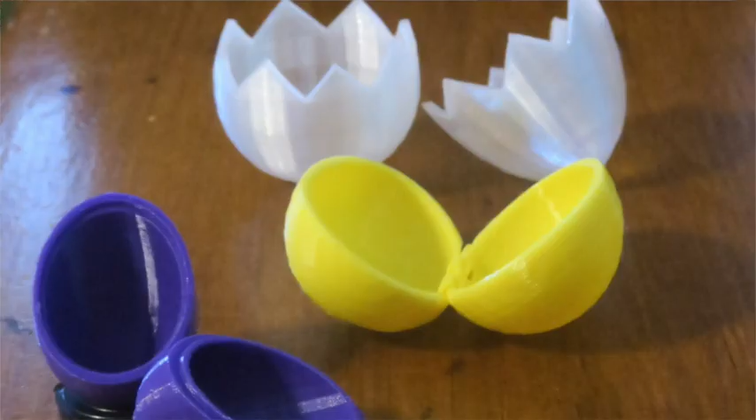Welcome to the fourth part of our Tinkercad egg puzzle demo. So we're making a toy consisting of several eggs, each inside the next one. And the last layer that we made was this here. So this was a piece consisting of two halves that are connected by a hinge. So the next egg that we make will have to fit inside.

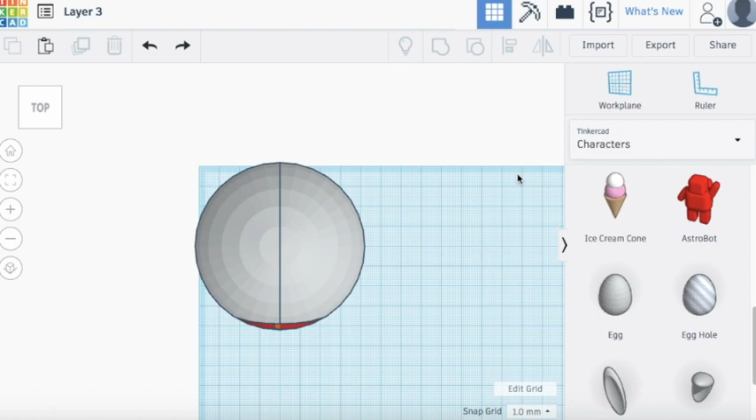The next layer is going to be again an eggshell, and this time we're going to cut it open diagonally. So let me take these egg pieces and make them transparent. Now if you look here carefully, you see that the available space from here to here, we measured that last time, it was 60 millimeters, but here from top to bottom we don't have 60 millimeters because the hinge actually takes up a little bit of extra space.

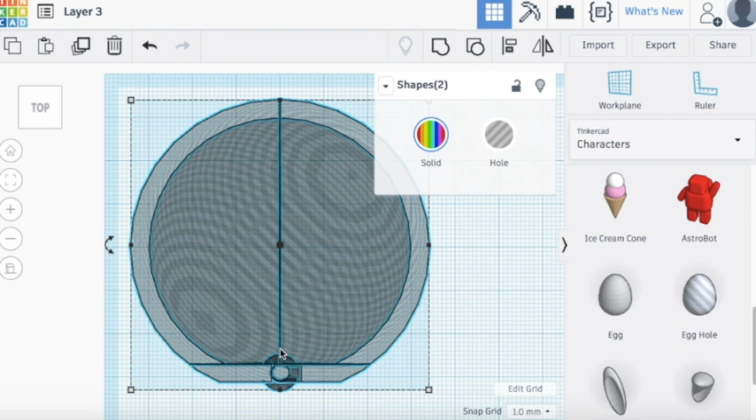So the next egg that's going to go inside here is not going to be quite round. We're going to use 56 for the width from here to here, and we're going to use 52 from here to here. So let's bring the next egg in. And we're going to make the width 56 and the depth 52 millimeters. Okay, so that's going to be a little bit oval.

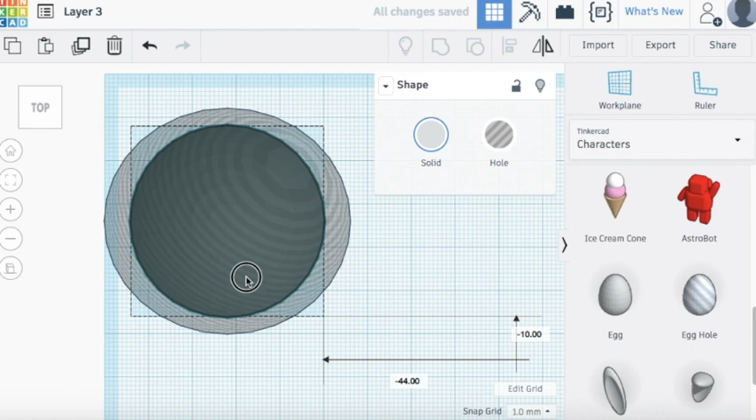And inside this egg, we want to fit a hole. And the hole, we're going to take 44 by 44. So we want the hole inside to be round, even though the egg is not exactly round. And the reason for this is that the next layer of the puzzle is going to be, again, round, the one that goes inside this hole. Oh, we also need to adjust the height of these two pieces. So we're going to use 76 for the height of the outer egg, and we're going to use 68 for the height of the hole.

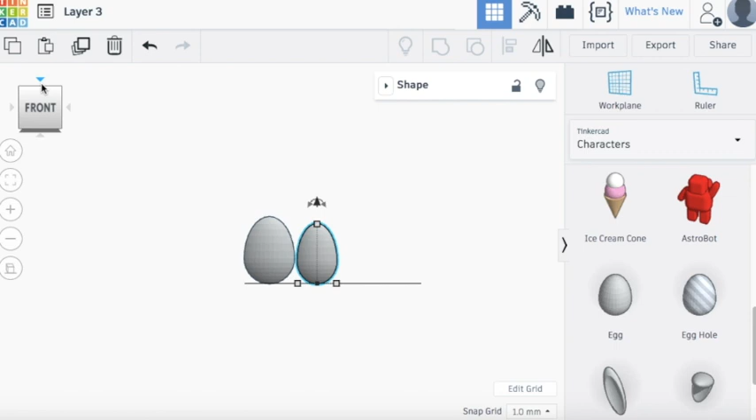Now, cutting it open diagonally will not be very difficult. But we also want, where the cut is, a slight lip to make sure that the pieces don't slide off each other. And making this lip is actually a little bit complicated. So we will actually need 4 concentric eggs instead of just these 2. So let me move this out of the way and bring 2 other eggs in.

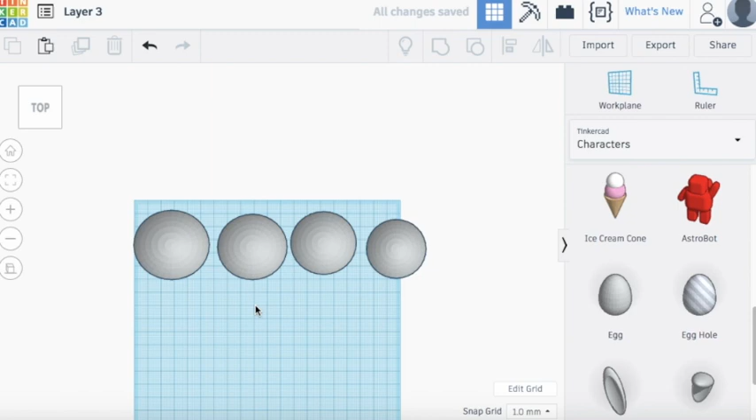So we had 56 by 52 for this egg. Then for the next layer here, we're going to use 51.5 by 49. And for this egg here, we're going to use 48.5 by 47. Okay, so each of these eggs is just slightly smaller than the previous one. And we will adjust the heights also. For the height of this egg, we're going to choose 73. And for the height of this egg, we're going to choose 71.

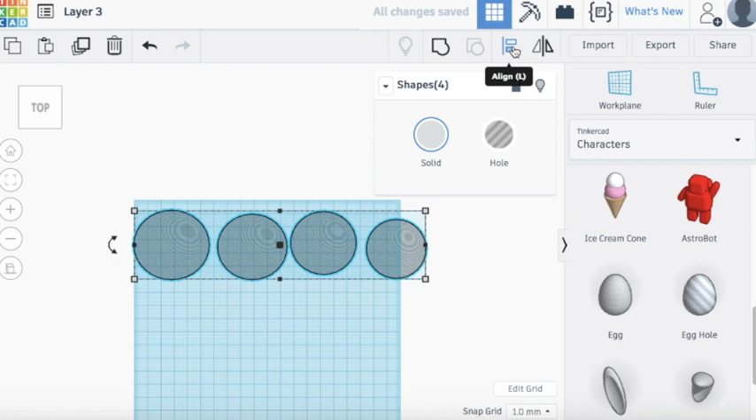So now I can take all of these eggs. First of all, let's make them all transparent so we can see. We're going to use this align tool here to align all the eggs one inside the other. I'm going to align them vertically also. Let me take all the pieces and move them over here to center them on one of these pairs of grid lines here. So the next step is we're going to want to cut this egg diagonally into 2 halves.

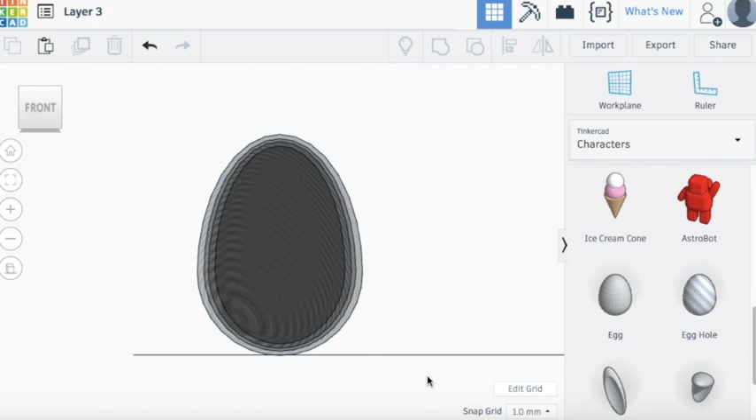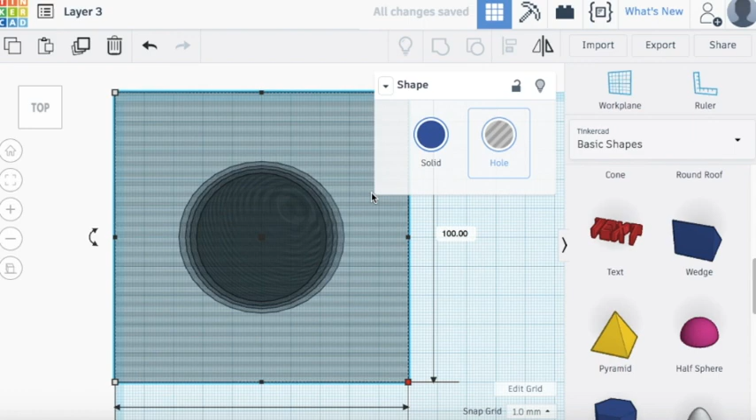So in order to cut it, I'm going to construct a stencil, a pair of stencils actually. And from our basic shapes, I'm going to bring in 2 wedges. The first wedge, I'm going to rotate it first by 90 degrees. So now it looks like this from the front. And then I will take this little wedge and resize it. I'm going to hold the shift key down so that all 3 dimensions will resize at the same time to 100 by 100. And I'll also make it transparent so we can see the front view here.

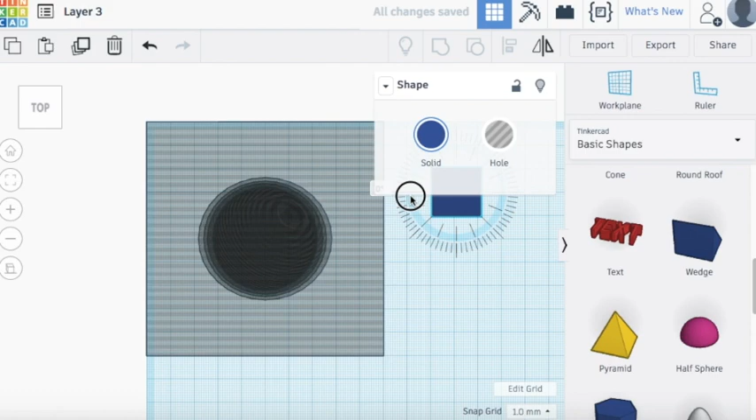And I'm going to bring it down a bit to somewhere approximately where I want the actual cut to be later. So I moved it down by 15 millimeters. Okay. And we're going to make also another matching piece. I'll bring another wedge in and turn that also by 90 degrees. And this matching piece, actually I want this to be the other way around. So let me turn it over this way. I'm also going to take this piece and flip it. So there's a flip tool here. I'm going to flip it vertically so that it's sort of the complement of this first one here.

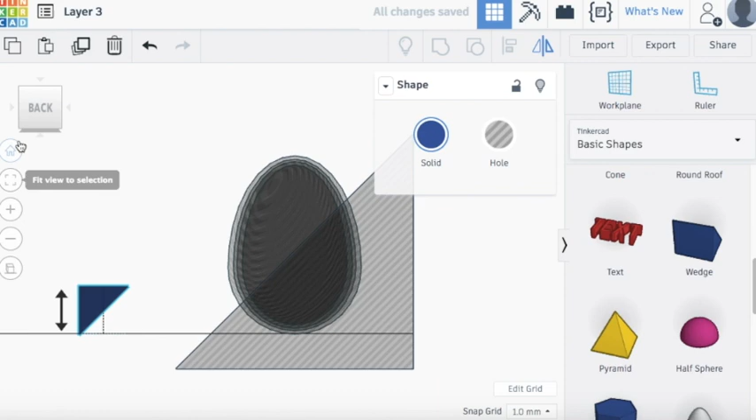And I see I'm in the back view now for some reason. Let's go to front view. And now I will also resize this piece. Again, hold down the shift key and resize this also to 100 by 100. And I'll make it transparent at the same time. So now I can move it over to the same location where the first one is. So in top view, that's a bit easier to see. Move it over here.

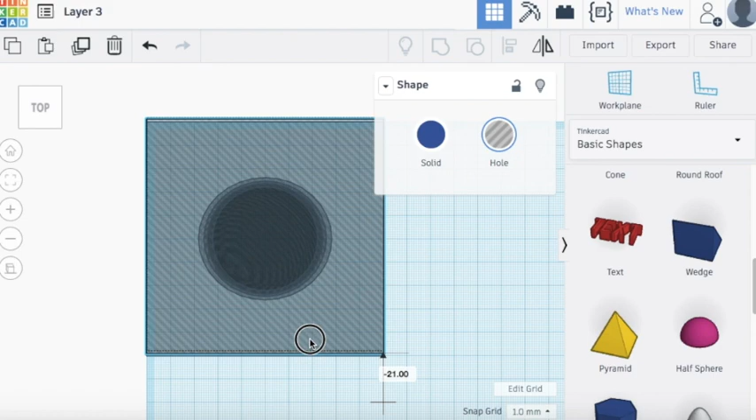Then I'm also going to adjust its vertical position. Now I don't want these pieces to touch exactly, so I'm not going to bring it down to -15 here, but let's say I'll bring it maybe 4 units higher. So there's a slight gap between these two pieces here.

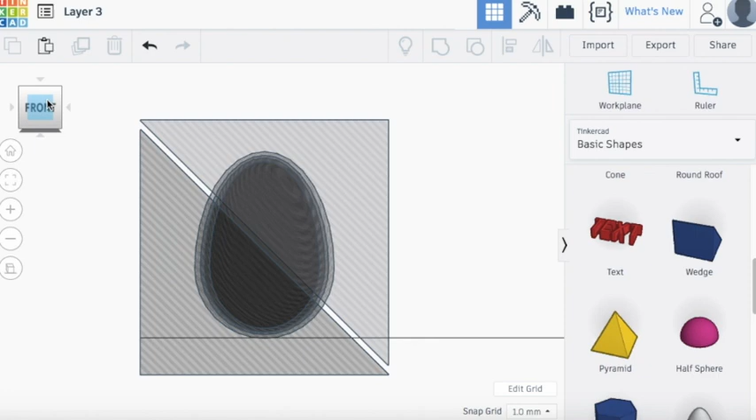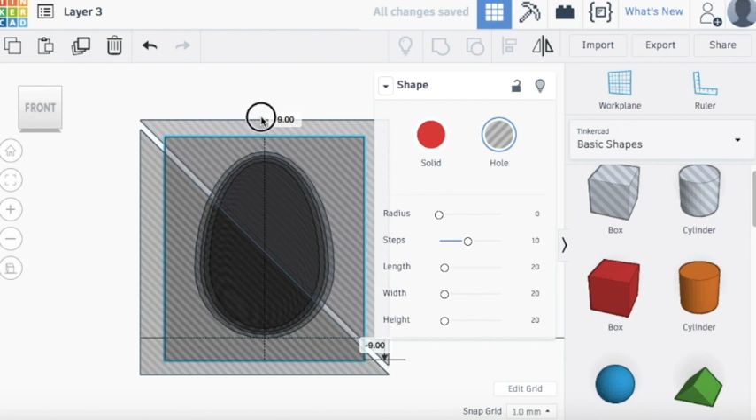And finally, I will also bring in a box. Might as well make it transparent. And I want this box to be slightly smaller than the various wedges that I've made. And I want the box to also contain the egg, so I'll make it just a little bit higher, and then I'll bring it down a bit so that it sits basically between my two wedges and the egg.

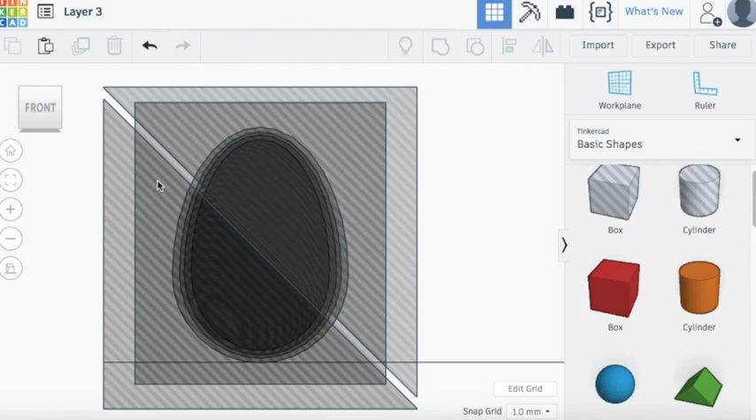Okay, so now I have 7 pieces, and it's going to be a little bit difficult to work with them, to select them all at the correct times. So there are 4 concentric egg pieces here, and then there's an upper wedge, a lower wedge, and then my box. So in order to be able to work with these pieces and select them more easily, I will use a trick, which is I'm going to tag the pieces with letters. So let me bring some letters in.

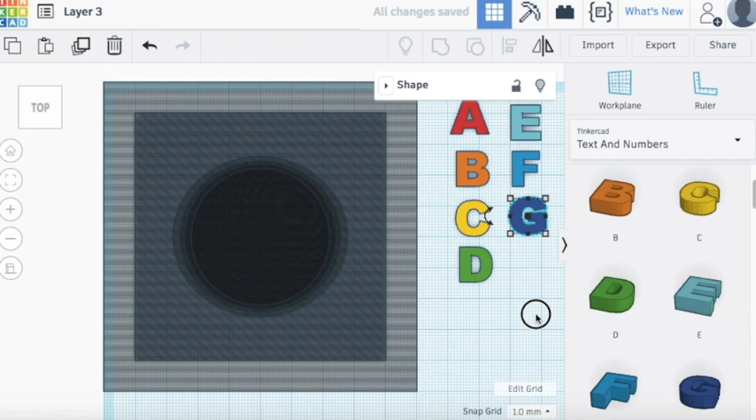A, B, C, and D are going to be the names of these 4 concentric egg pieces. Then E will be the name of the upper wedge, F will be the name of the lower wedge, and G will be the name of the box. So if I select all of these letters now, I'm going to go to side view briefly, and I will rotate them by 90 degrees so that I can actually see the letters in the front view, and I will bring them up also a little bit. So from front view now we have the letters nicely aligned next to all of my pieces here.

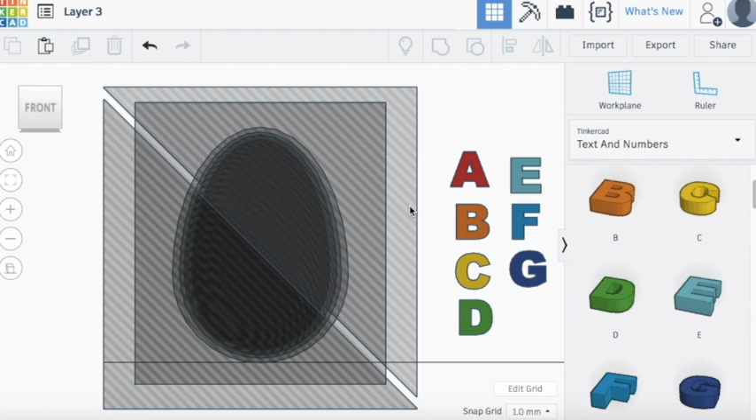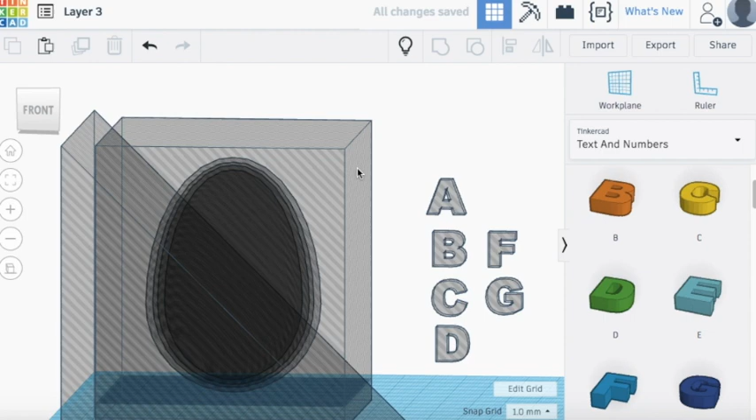And now I'm going to go ahead and group each of the pieces with the letter that it corresponds to. First I'm going to make the letters transparent. So the upper wedge is going to go with the letter E. So I group them, and then let me just hide them. This box is going to go with the letter G. So I shift click again to select 2 pieces, and then I group them and I hide.

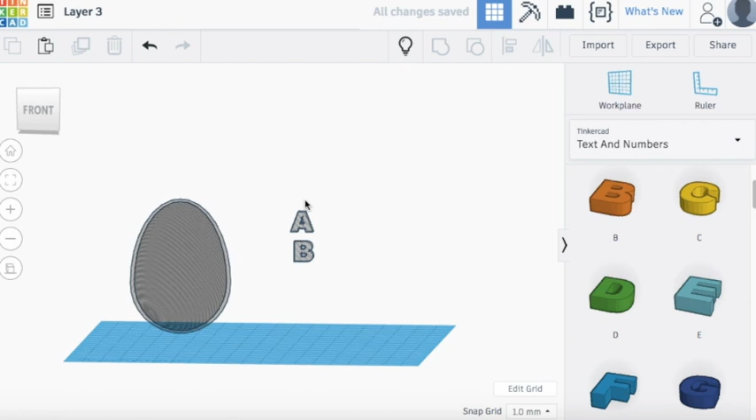The lower wedge will go with the letter F, group, hide. The innermost egg will go with the letter D, group, hide. The second innermost egg will go with the letter C, group, hide. The next egg will be called B, group, hide. And finally this outer egg will be called A, group. And now I can unhide everything.

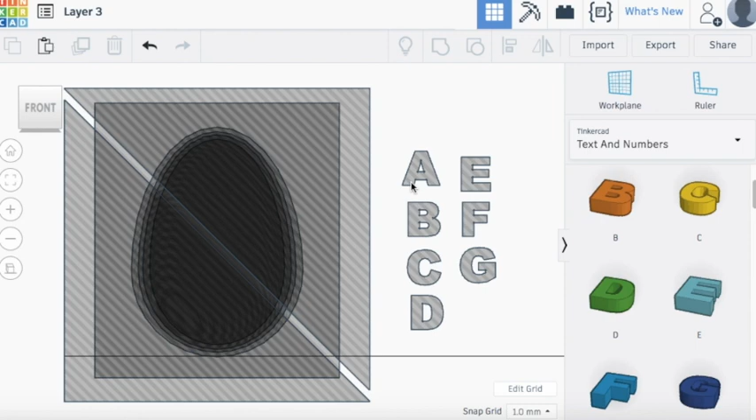And this now allows me to select the pieces more easily. For example, I could select C and G or F. So I can just select each of the pieces by clicking on these letters. I just have to be careful later to remove the letters at the right time when I no longer want them. So the next thing we have to do is create the actual pieces. So let me zoom in a bit here so we can actually see how that's going to work.

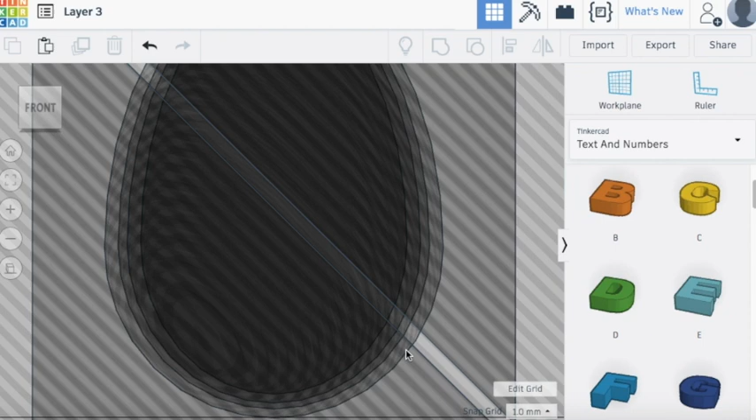So the actual eggshell will be bounded by the outer and the inner layer here, so layers A and D. And then when we come to the actual cut here, I want there to be a lip. So I want the shape to be like this, and then like this, and then like this, and like this for the upper piece. And I want the shape of the lower piece to be like this, then go here, here, here, and here, and then here. That's where the lip is actually going to be constructed.

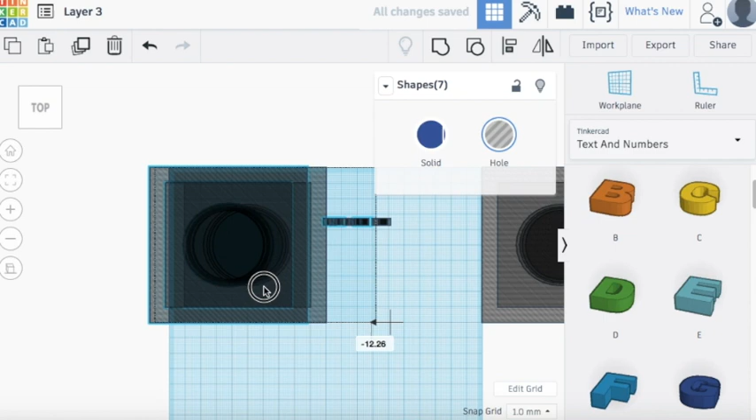So what I need is I need to make 3 copies of everything. So let me select everything that I've made so far and duplicate it, and then I'll just move it 200 units to the right so that it's out of the way, but I can bring it back later when I need it. And the second time I select everything, I duplicate and I move everything exactly 200 units to the left. So now I have 3 copies of everything that we've made so far.

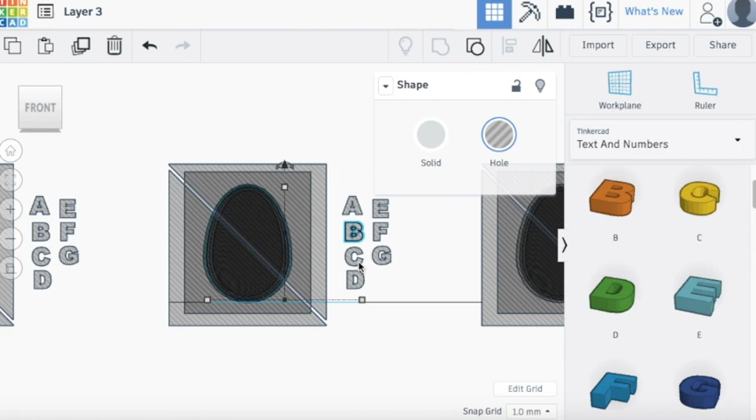Now we're going to start with the middle copy. In the middle copy will be the actual egg, only the shell, which I will cut into 2 pieces later. So I don't actually need B, C, E, F, or G in this middle copy, and I'm going to delete them. And then I will simply construct the shell by subtracting D from A. So actually, I don't want the letter A to be here in the end, so I'm going to ungroup this and I'm going to delete the letter A.

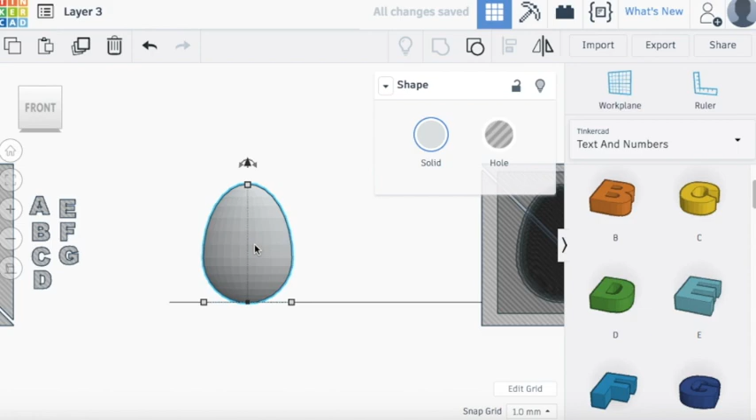And then I will just select the outer egg and I'll select D and I will group them. So this egg is now hollow inside, although of course we can't see it right now because, well, we still haven't actually cut it open.

Okay, so that was the easy part. Now I have to construct 2 stencils for making the actual cuts and also the lip that's going to go on these cuts. So let me start with the right stencil, which is going to be the lower stencil. So for the lower stencil, I will only actually need the pieces F, B, and E.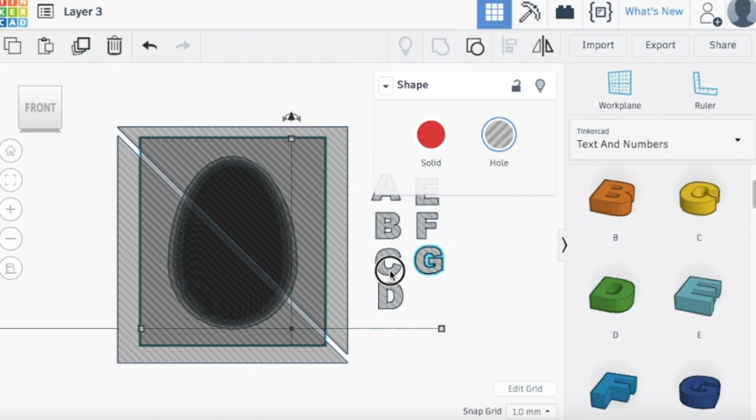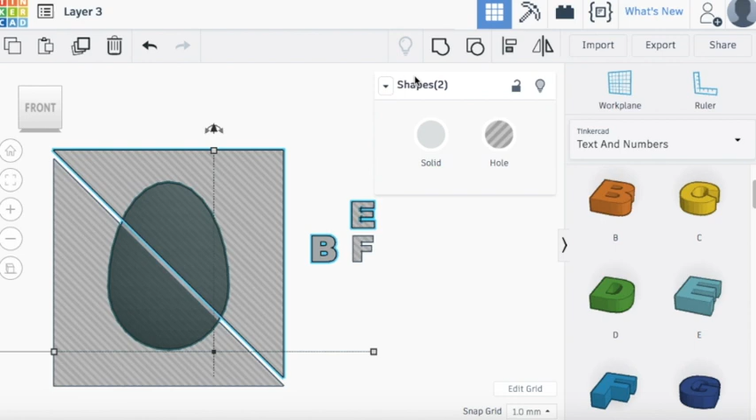So everything else can be deleted. I don't need A or C or D or G. So I will delete these. I'll only need F, E, and B. And then what we'll do is we'll take B, we'll make it solid. So that's just one of the in-between eggs selected here. Now I only want the bottom half of this egg. So I'm going to select E, which is a hole, and then I will merge the two.

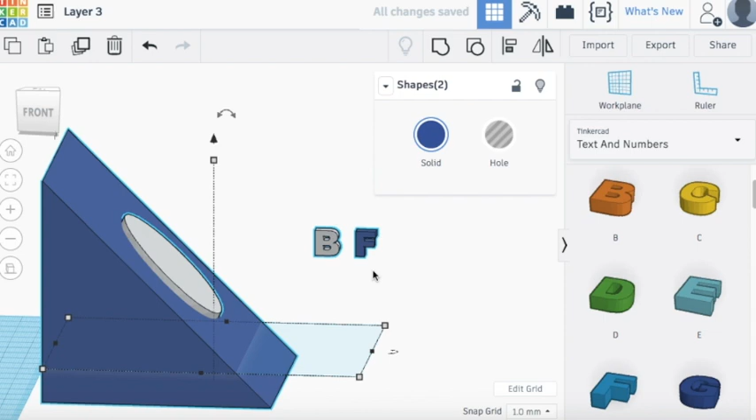So what we can see right now is I've basically cut off the upper half of this egg, but it's sticking out just a little bit from where my lower wedge is here. And then I'm going to take the lower wedge F, make that also solid, and then I will just group these 2 shapes together. And maybe for color, I'm just going to select gray. So now the stencil is basically a lower wedge, just with this additional piece of almost like a cylinder attached to it.

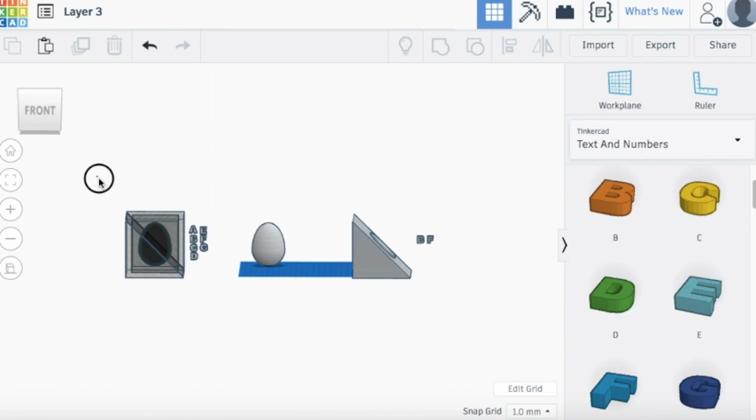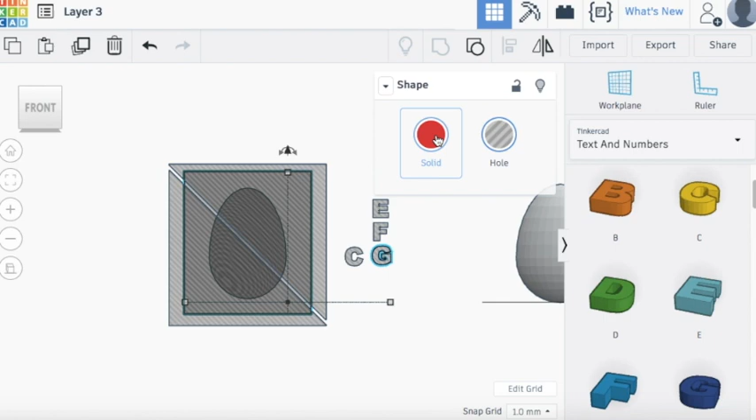And now let's go work on the upper one. So there's a similar process that I'm going to follow here. For this upper stencil, I will only actually need the shapes C, F, E, and G. So A, B, and D can be deleted. I will not need them. And this time I'm going to start with the box G. So I will make this solid, and then I will remove certain pieces from it. First of all, I'm going to remove F from the box. So I group, and now I only have kind of the upper half of the box.

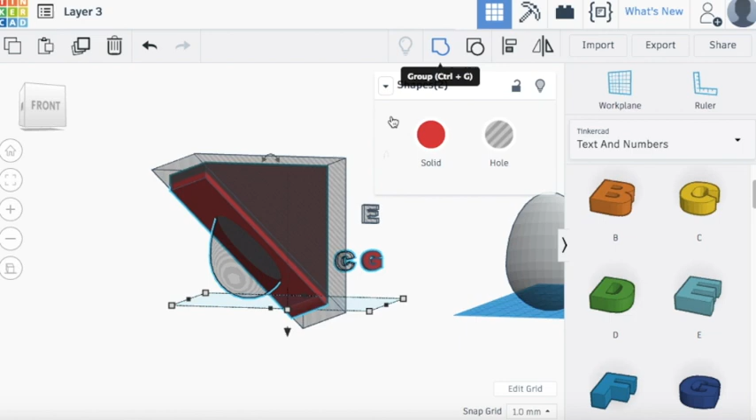And then I also want there to be a hole in it of the shape of C. So I will shift select C and group again. So now we'll be able to see that there's now an egg-shaped hole in this red shape here. Especially if I hide E, then we can see there's an egg-shaped hole in the red. Okay, but let me unhide that.

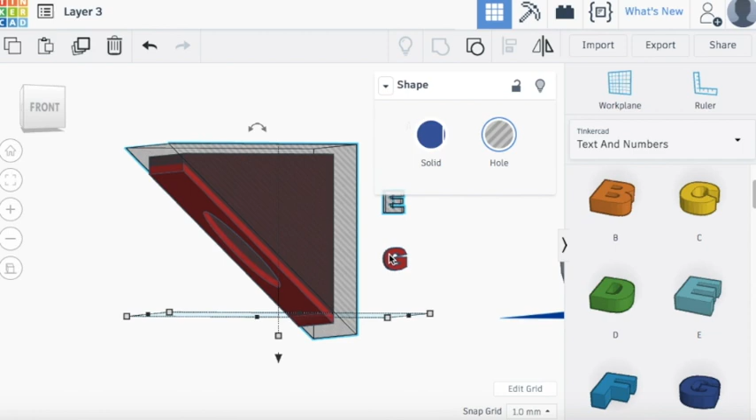And finally, I just want to also take the union of these pieces. So I'm gonna select them both, E and G. I'll make them both solid, and I will group them. And maybe I'll also change the color to gray again. So this is my upper stencil. It's basically flat with a bit of an egg-shaped hole in it.

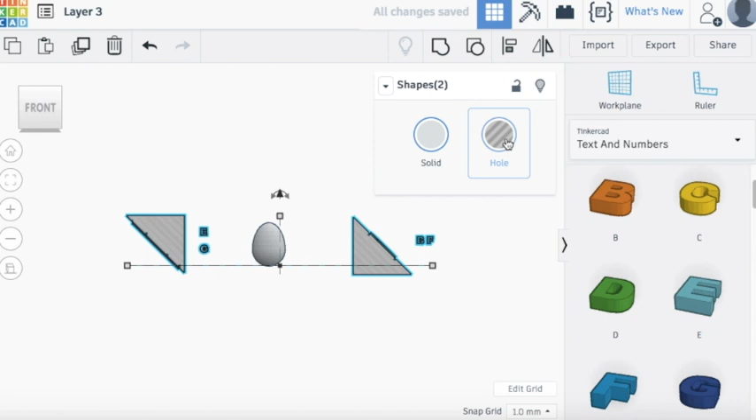So now let me take both of these stencils and change them to transparent. And then I will take both of these stencils and actually move them back to where they were. So I have to move this one by exactly 200 millimeters. And I have to move this one also exactly by 200 millimeters. And now everything is back in place. I've got my egg in the middle and I've got the 2 stencils. Everything is lined up perfectly, and I still have some letters here as well. So I don't really need those so much anymore.

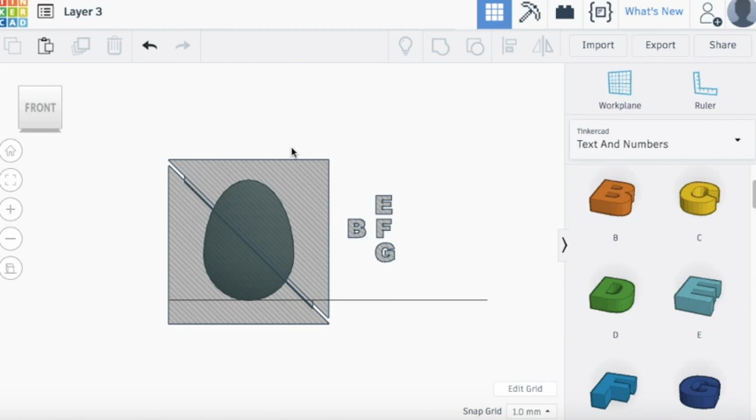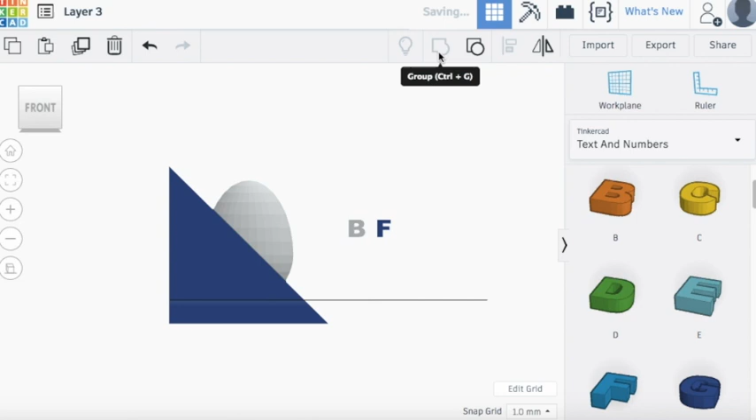Okay, and now we'll cut the egg in exactly the same way that we did in the first layer. So I will select the inner egg and I will duplicate the inner egg, and then I will also select the upper stencil. I'll group them, and that's going to remove the upper half of one of the inner egg copies. Then I'll select the other inner egg copy and the lower stencil, and I'll group them. Okay, so now we have the upper egg half and the lower egg half, and it's been cut in 2.

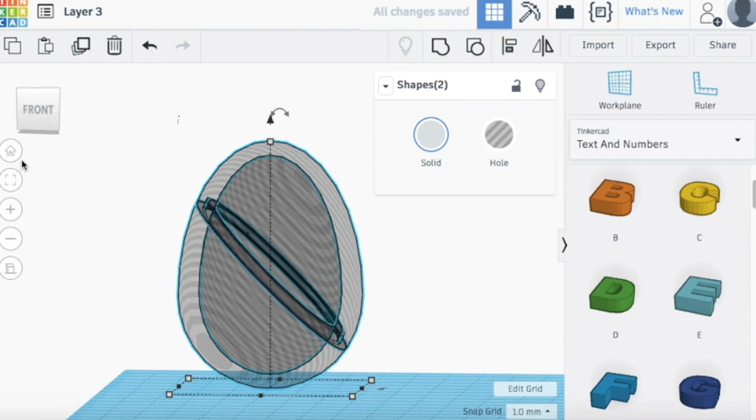And actually I can move them apart now, and when you look inside, you can see that there is actually a lip. Let me command Z, so I move them back together. Let me make everything transparent and switch to front view, and then when you zoom in on it, we can also see exactly what the shape of this lip is. So the upper piece goes like this, and this, and this, and this, and the lower piece goes like this, this, this, and this. So the 2 middle eggs that I had, they were only for cutting out these 2 pieces of the shape of the lip.

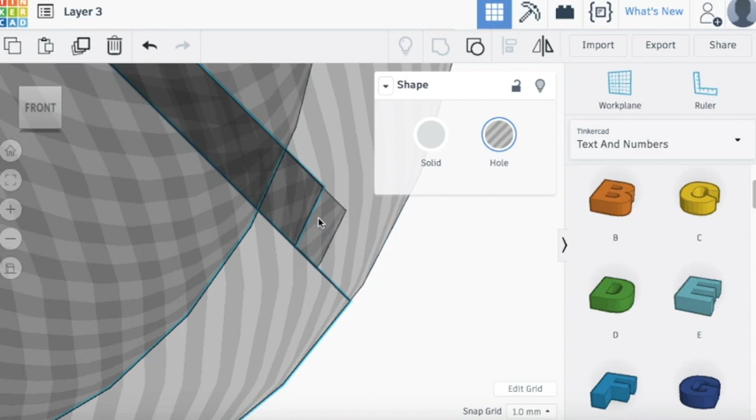And the reason I left a little bit of space here between them is just to make sure that after printing, the two pieces will actually fit together, because there could be a bit of extra material. If you made them exactly the same, then it's possible that your egg will not actually close. So with this, let's change everything back to solid. With this, we are finished with the third layer of our egg.